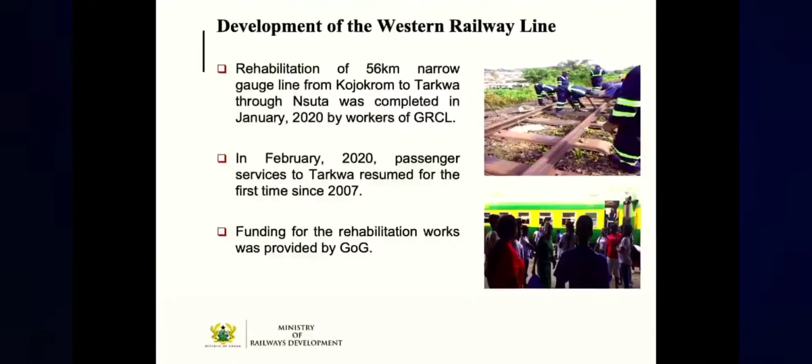Unfortunately, due to several decades of neglect and underfunding, the Western Line is completely broken down, except for partial freight services on the Takoradi-Nsuta section, used for haulage and export of manganese through the Takoradi port. Fortunately, in 2017, government budgetary support was provided for the rehabilitation of sections of the existing narrow gauge Western Line from Kojokrom to Tarkwa through Nsuta, to facilitate efficient haulage of manganese from the mines in Nsuta to the port of Takoradi, and also to facilitate passenger services. The rehabilitation project was completed in January 2020 under my predecessor, Honorable Joe Ghartey, and passenger service was reintroduced from Takoradi to Tarkwa for the first time since 2007.

Apart from the rehabilitation of the Takoradi-Nsuta narrow gauge line, the standard gauge line is also being developed. Firstly, the construction of the 22 kilometer Kojokrom to Manso section of the Western Line, which commenced in 2018 with funding by the government of Ghana, is currently 72% complete. This project is expected to be fully completed and handed over by the contractor, Amandi Holdings, to the government in the second quarter of 2022.

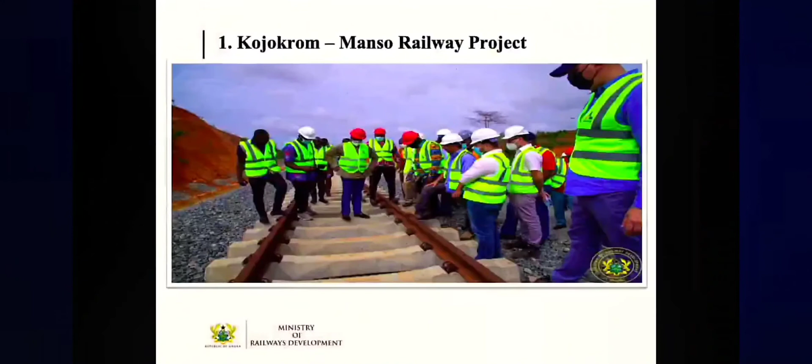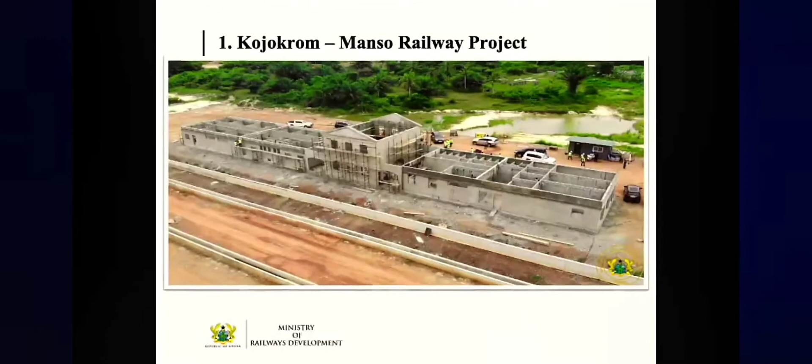The development of the new standard gauge Western Line is expected to continue in 2020 from Manso to Huni Valley, also by Amandi, under a credit facility. I am happy to announce that the contractor has already been paid a mobilization fee close to 68 million euro for commencement of this section. As I speak, mobilization work has begun and the contractor has moved to site to begin this section of work. The total sum of this contract, with a total length of about 78 kilometers, amounts to 500 million euro.

The project will also include conversion of the dual gauge tracks between Takoradi and Kojokrom from narrow gauge to standard gauge, and the construction of a new standard gauge rail line from Takoradi section to Takoradi port, in order to have a continuous standard gauge connection from the port to the Nsuta manganese mine and other mines, to facilitate efficient haulage of these materials.

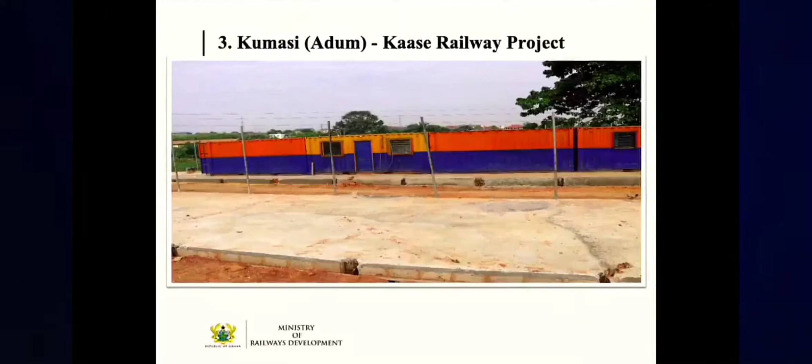Still on the Western Line, the government of Ghana is providing funds under the Annual Budget Funding Amount (ABFA) for the development of a new 6 kilometer standard gauge line in Kumasi from Adum to Kaase. The contractor, David Walters Limited, has mobilized to site to undertake site clearance works for construction of the new standard gauge line. The project is expected to be completed over a 12 month construction period.

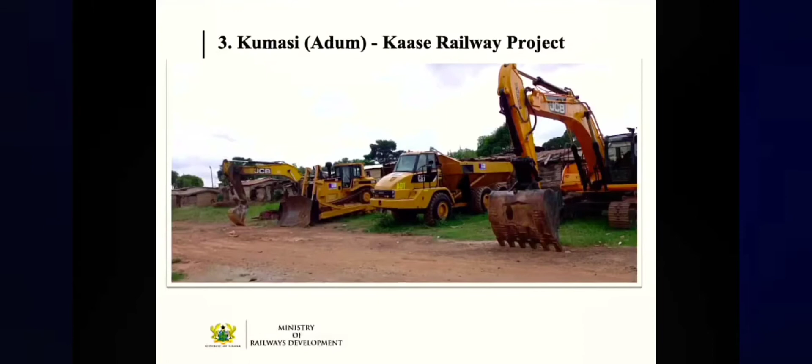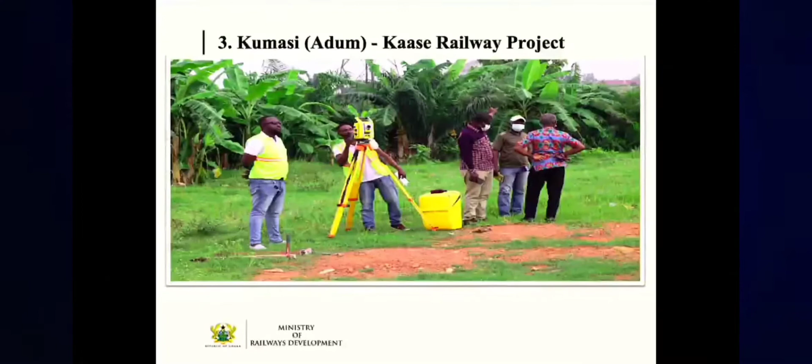In order to complete the development of the Western Line to link up with the new bauxite deposit at Nyinahin, to support exploitation of bauxite and facilitate the development of the Ghana Integrated Aluminium Development Project being pursued by government, preparatory works are currently ongoing for the development of the following sections of the Western Line.

One, the section from Kaase to Eduadin, approximately 12 kilometers. Two, the section from Eduadin to Obuasi, approximately 51 kilometers. Three, the section from Huni Valley to Dunkwa, approximately 75 kilometers. Four, the section from Dunkwa through Awaso to Nyinahin, approximately 137 kilometers. And five, the Dunkwa to Obuasi section, approximately 38 kilometers.

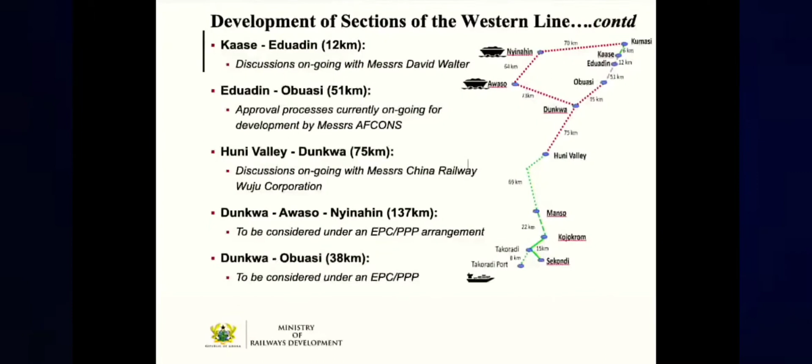The Eastern Line links Accra to Kumasi with a branch line from Achimota to Tema Port. Following years of neglect by successive governments, large portions of the existing narrow gauge line were not operational, with the exception of the Accra to Tema and Accra to Nsawam sections, which are used to provide passenger commuter services from time to time.

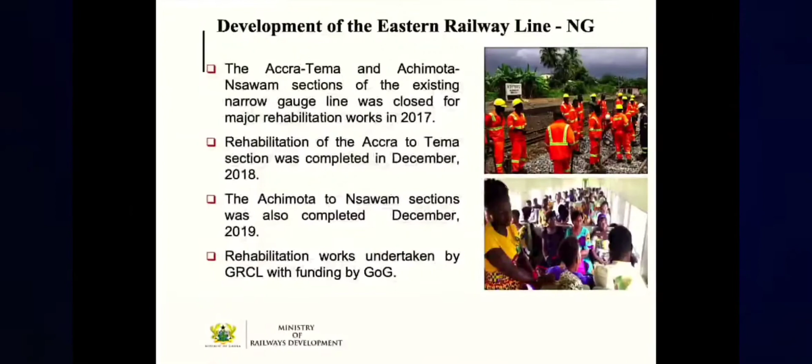Rehabilitation works were carried out on the section of the line from Accra to Tema and also from Achimota to Nsawam by the Ghana Railway Company Limited in December 2018 and December 2019, respectively. Passenger rail services on the line were, however, suspended in April 2020 due to the COVID-19 pandemic.

As part of efforts to address the perennial flooding that occurs at Avenor near the Kwame Nkrumah interchange, the Hydrological Service Department took advantage of the suspension of the passenger service on the line to undertake the construction of a concrete culvert across the rail track. Similar culvert construction works were undertaken across the line at Taifa by the Ghana Railway Company Limited.

At the moment, the Ghana Railway Company Limited, which is the operator, and the Ghana Railway Development Authority, the regulator, are undertaking joint test exercises in order to reopen the line for traffic.

The ministry is also going through the required approval processes to effect a contract with KEC to utilize an Indian Exim Bank facility for development of a new standard gauge line from Accra to Achimota through Kotoku to Nsawam, to begin the development of the entire Eastern Line. As I speak, the parliamentary memo is ready for consideration.

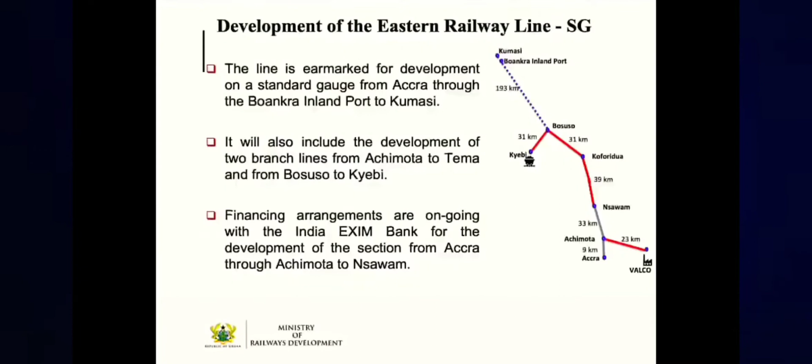The new Eastern Line will run from Accra to Kumasi and will serve the Boankra Integrated Logistic Terminal, and will also have a branch line from Bosuso to Kyebi and also from Achimota to Tema to facilitate the haulage of bauxite under the Ghana Integrated Aluminium Development Project.

The development of the Tema to Mpakadan section on standard gauge line is being developed by Afcons Infrastructure Limited with an Exim Bank facility, and is also on course. This project is expected to be completed before the second quarter of 2022. As I speak, the project currently is about 90% completed and covers approximately 100 kilometers of the proposed Ghana-Burkina Faso Railway Interconnectivity Project.

The remaining sections of the rail interconnectivity project, spanning about 1,100 kilometers from Mpakadan through Paga to Ouagadougou, is being implemented under a PPP arrangement. The government of Ghana and the government of Burkina Faso are jointly going through the necessary procurement processes as established by law within the two countries.

My good friends from the media, in order to ensure that Ghana develops adequate local capacity to manage and maintain the railway system, which is currently undergoing modernization, the new Railway Central Training Institute, located at Sekondi in the Western region, has been refurbished with Government of Ghana funding since January 2022, providing training for over 300 youthful Ghanaians in various engineering and degree programs.

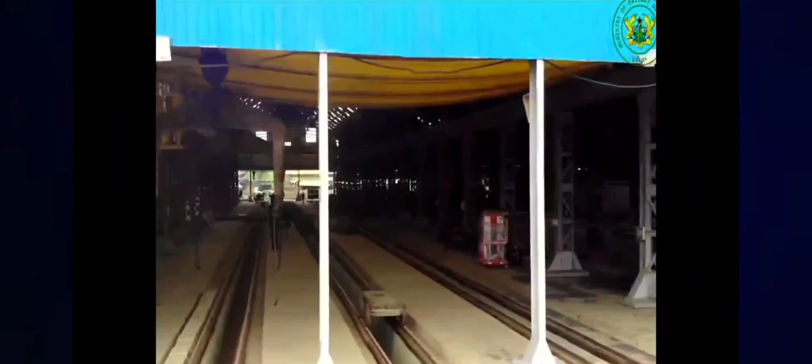Government is also currently upgrading the old railway workshop complex at Sekondi to strengthen local capacity for the repairs and maintenance of locomotives, wagons, coaches, and other ancillary railway equipment for the efficient delivery of the Ghana railway system. The vision is to modernize and equip the facility for it to become a one-stop workshop to serve the railway, mining, petroleum, agricultural, and other ancillary industries within the country.

2 out of 7 of the workshops at the facility have currently been refurbished with funding by Government of Ghana. The remaining 5 are currently undergoing refurbishment by CK Engineering Limited.

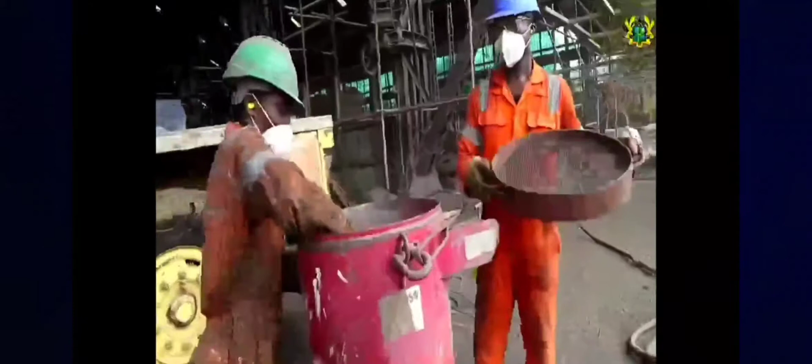I wish to conclude my presentation by reiterating that the development of infrastructure, and for that matter the railway system, will create jobs and facilitate trade and industrial development, which will in turn stimulate economic growth and poverty alleviation. In the process, new towns and cities will be developed, and old towns would also be revitalized.

Let us therefore join hands as we continue to support government to deliver on its mandate to ensure the needed railway infrastructure is put in place quickly, to help alleviate poverty and improve on our standard of living. Thank you all for your kind attention.

Thank you, Honorable John Peter Amewu, for the good work done and for that insightful presentation. Before I come to your question, permit me to acknowledge the Managing Director of Ghana Railway Company Limited, Engineer Dr. Michael Ajay Anyete.

Ladies and gentlemen, for the benefit of those media houses that are non-English speaking media houses, permit me to just give a summary in Akan.